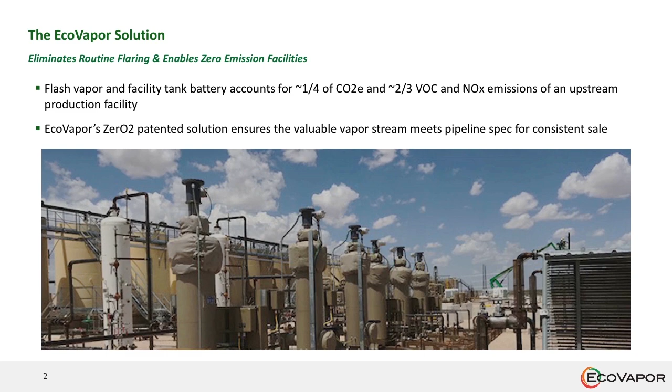EcoVapor's focus is on the facility's storage tank battery, which represents a significant portion of upstream greenhouse gas emissions. The tank battery accounts for about a quarter of the total CO2 equivalent emissions from a typical upstream site. A valuable high BTU vapor stream is generated in the tanks, as they're the best separator on the pad due to high residence time and very low tank pressures. The status quo management practice of this vapor is typically to burn it using some type of flare or combustor.

A typical EcoVapor sales conversation starts with an operator asking for our help to address a regulatory issue or achieve an environmental goal. EcoVapor is the most economical solution for these scenarios.

There are powerful drivers in our industry that are placing an intense focus on greenhouse gas emissions and routine flaring. Many states have either enacted tighter regulations on flaring or are actively considering such action. Colorado has drafted rules calling for flaring in emergency only and have cut the threshold to be a major emissions source in half. New Mexico is following Colorado's actions closely and are expected to enact parallel rules soon.

There is now a significant focus on flaring and permitting of flaring in Texas. Enforcement actions, including site audits and drone flyovers, are becoming more frequent and more diligent.

We speak to many operators who have notices of violation or are wanting to stay even or get ahead of the rulemaking activity. Many operators, large and small, have adopted corporate objectives and have tied corporate bonuses to reduction in emissions and flaring. Major operators are no longer willing to just be compliant. They are actively demonstrating their commitment to environmental leadership.

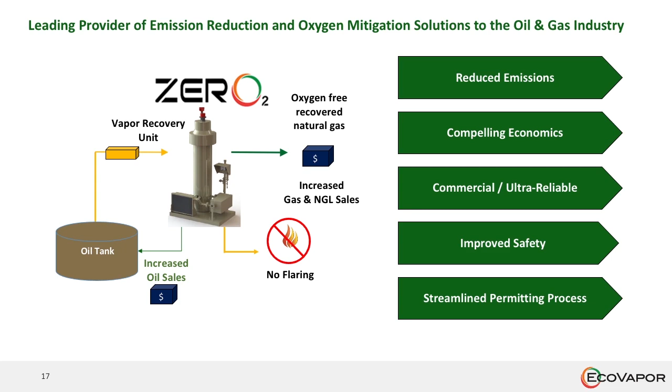EcoVapor solution has many benefits that bring value to the operator. A reliable and consistent means of 100% vapor recovery means permit modeling can be done much more precisely, more wells per pad, which provides CapEx and OpEx efficiency. Additional benefits are higher cash flow due to incremental oil and gas sales, streamlined permitting process in many states, and improved safety due to lower tank operating pressures.

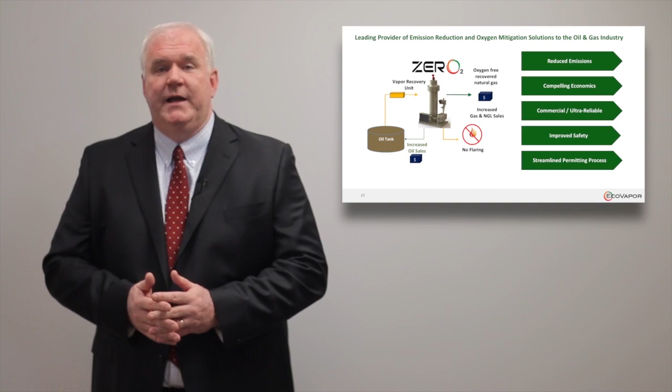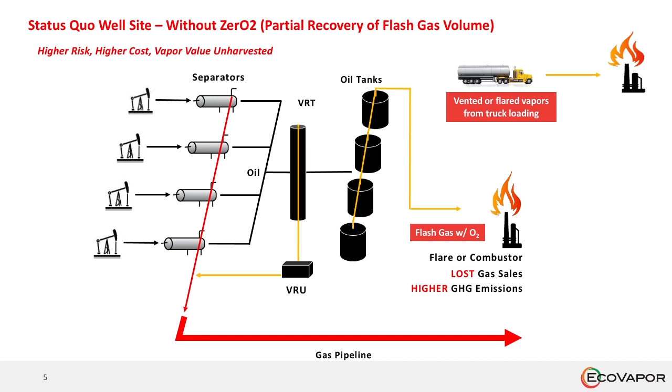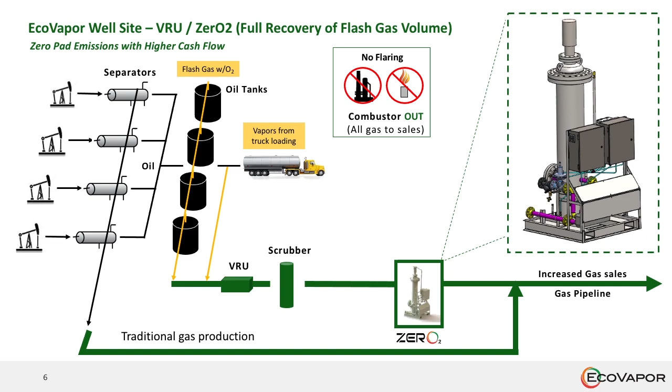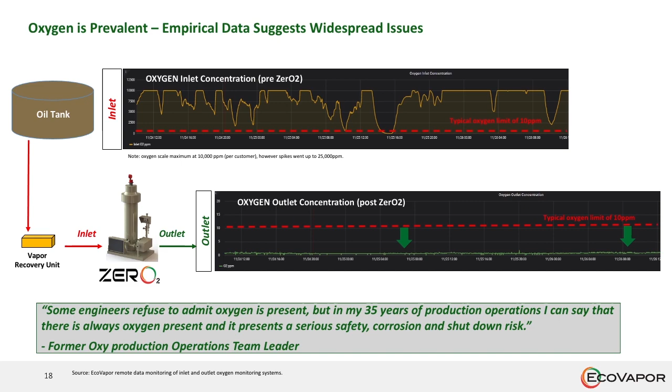The lower plot, with an expanded scale versus the first plot, shows the same gas stream after treatment by the ZerO2 unit, with the red dashed line still showing pipeline maximums and the gas stream showing consistent, compliant oxygen levels, indicated by the green line that is barely visible above the 0 ppm line. In fact, the EcoVapor unit can treat gas with up to 15% air content consistently and reliably down to pipeline spec.

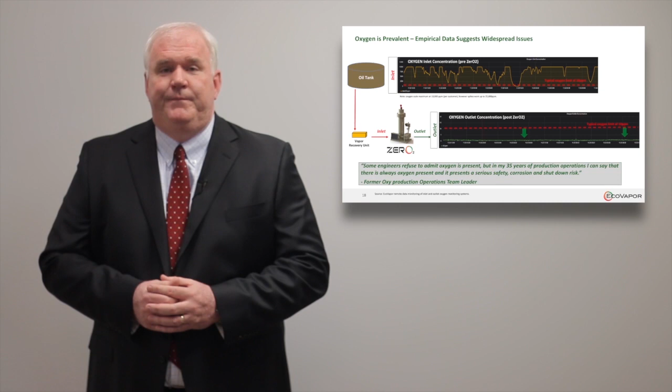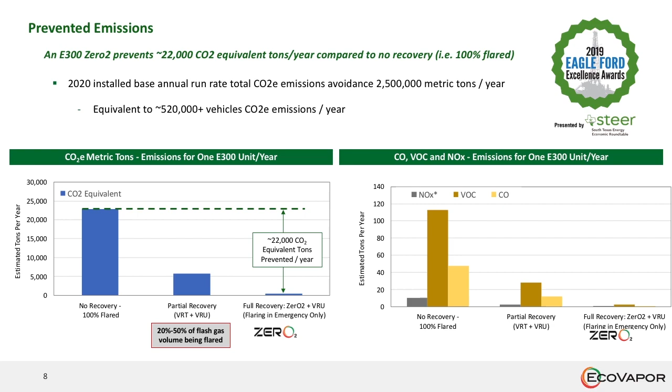Our 110 installations then provide a collective run rate of avoided emissions of over 2.5 million tons of CO2 equivalent per year. And this equals the emissions from over 500,000 cars. I will now briefly discuss some actual case studies that highlight the adoption of our technology and the many ways we bring value to operators.

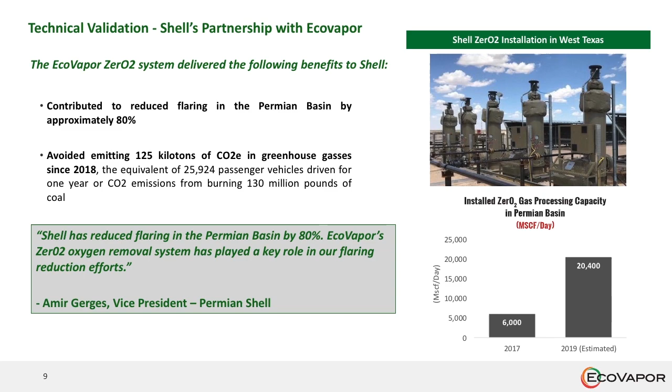Driven by Shell's global environmental leadership, EcoVapor was invited to collaborate with Shell to design a system to capture 100% of the vapor in their upstream Permian operations. Using the system we developed together, Shell currently treats over 20 million standard cubic feet per day of tank vapor using EcoVapor technology, and credits EcoVapor as a key partner in their 80% reduction in Permian flaring since 2018.

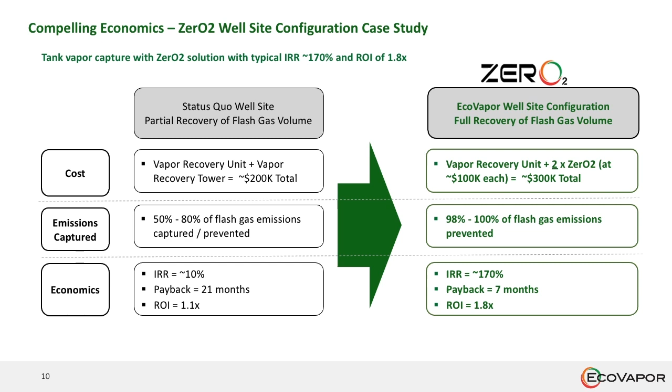A large Mid-Con operator, utilizing the status quo upstream process configuration and flaring continuously, engaged with EcoVapor with the goal of putting out their flares while achieving at least 100% internal rate of return. The EcoVapor system was installed, eliminating the VRT. Now, the flare is out, and the operator confirmed an IRR of 170%. This 7-month simple payback is far superior to the status quo process the operator originally had in place.

The EcoVapor solution also allows Texas-based operators to apply for their air emissions permit, qualifying for 100% permit by rule. In this scenario, a qualifying site can be commissioned while the air permit is still being processed, saving time and improving the net present value of their investment in that well. In addition, 4 more wells were added to this well site while remaining below permit mandated emissions thresholds.

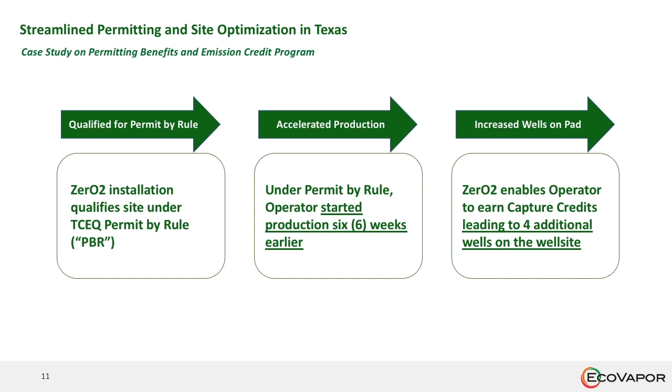EcoVapor now has a presence in all major U.S. basins and is now working with operators to adopt the ideal process in all of their site designs, as Shell did. EcoVapor is working hard to fully leverage the growing tailwinds we're experiencing with ESG-driven corporate initiatives and increasing regulatory scrutiny. This leads to wider operator adoption, and we also envision international expansion.

Our experienced and passionate leadership team are focused on bringing an attractive environmental solution to our industry. We all interface regularly with operators and earn our role as a trusted advisor on emissions management. We are fortunate to have an engaged and very supportive capital partner in EIV Capital. We are interested in developing other strategic partnerships to continue building out our growing team and expanding our commercial reach.